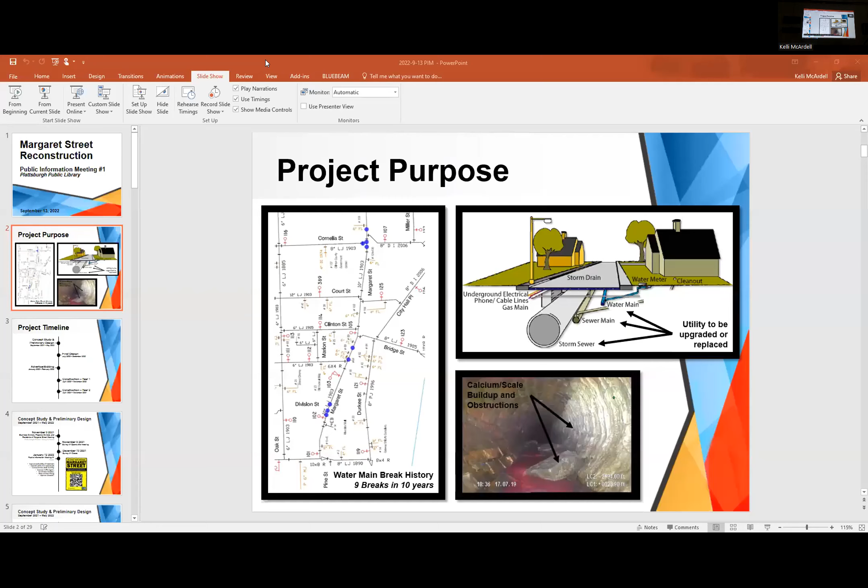So let's start with the project. Sorry, I'm getting told timeout. Sorry. And I think we're good now. Perfect, so I'm gonna keep rolling.

So let's start with our project purpose. Why are we doing the project on Margaret Street? The project is actually called Margaret Street, but for most of you who know and are aware of the project, it actually includes parts of Court and Brinkerhoff as well. But why are we doing this project?

We spoke, if you've been to any of the previous meetings, about the aging underground utilities. We talked about how some of the underground utilities are over 100 years old, and Andrew and his crews are going out -- we changed that number from 9 breaks to 10 breaks in the past 10 years. We know that when there's a water main break, it gets expensive. You have to mobilize emergency crews, do a temporary fix, and then come through and do a permanent fix later on.

So as part of this project, when we redo the utilities, what is going to occur is when you redo underground utilities, you have to dig down so deep into the ground. It is virtually going to provide an opportunity to install new sidewalks, new subbase, new asphalt, and virtually reimagine the top side of Margaret Street at the same time as replacing those underground utilities.

So that's a little tricky for you to understand. You can look at the picture in the top right. That's not just a normal photo that we show when we talk about underground utilities, because there's utilities running beneath the road that are providing the sanitary, water, different things like that that we use in our businesses and our homes every day.

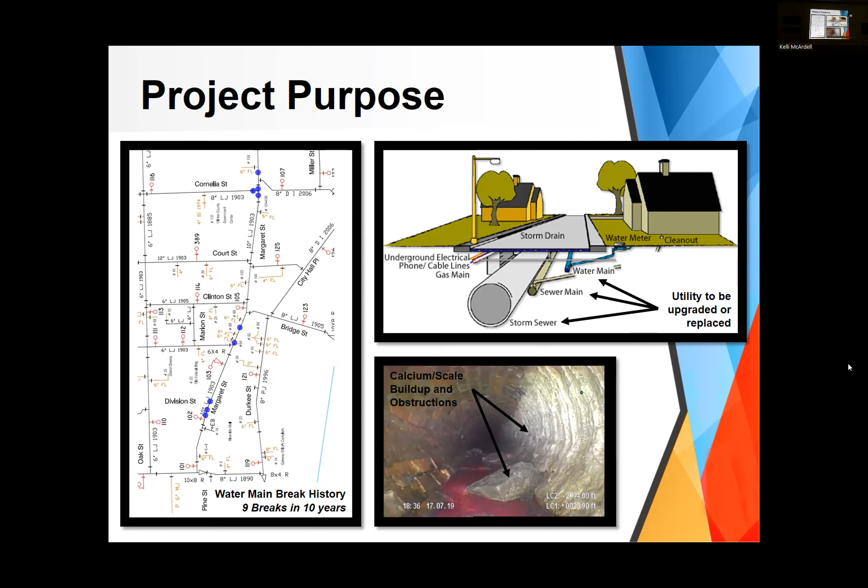Shannon, could you advance the slide for me, please? I got it. Thanks, perfect.

So our project timeline. Let's talk about how this project is flowing and where we are going with this project. So we talked about the concept study and preliminary design -- those were our meetings that were done previously.

And now we are rolling into final design. For those who are unaware what that is, that's where the engineering firm, us at C&S Companies, use what came out of that concept study to produce the project documents or project plans. We actually create 3D models of the roadway, so when they go to build the road, they will have it loaded into their bulldozers, and they can utilize that 3D model to help build the roadway more precisely.

So we're working in that final design stage right now. That's where we're really finalizing all of the details to produce those project documents. Some of you may know them as blueprints or project plans -- all different interchangeable words.

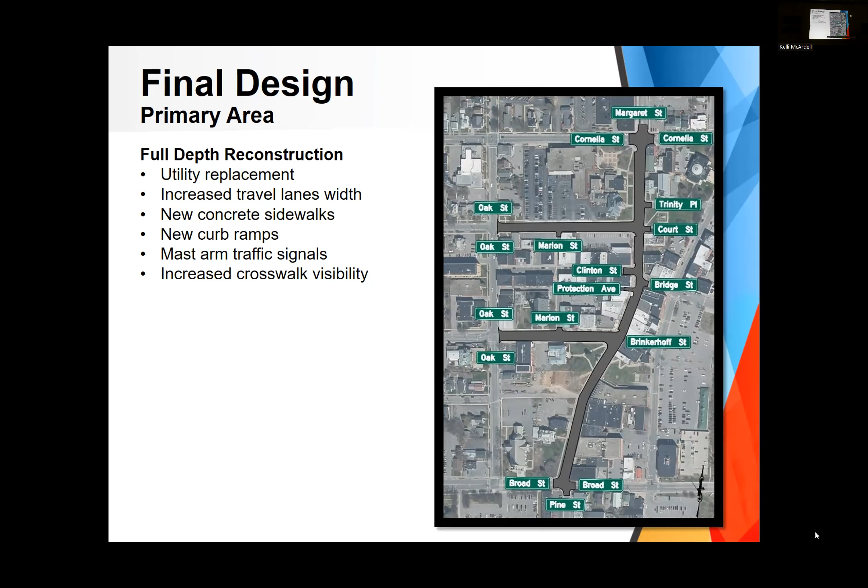So this picture right here is going to show the flow or circulation of the primary study area. What is changing is going to be the one-way from Court and Brinkerhoff. All the other travel flow directions are going to be the same.

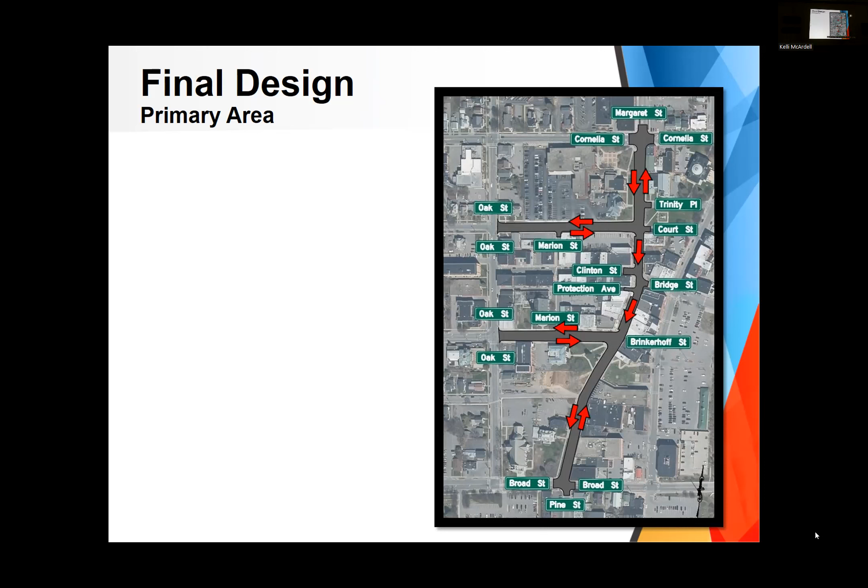We've previously talked about typical sections for those who have come to these meetings. A typical section is this graphic right here, like a cut of the roadway, so you can see what's going to occur within a certain area. So we broke out this project, and as you'll see, sorry for the people on Zoom, I'm blocking the video, I do that all the time, sorry.

So here is region 1. I'll put that up so you can see that. Anything that is a white car, if you can't read the text because I know it's a little small, a white car signifies a parking lane. It's not actually a vehicle driving, it is a parking lane.

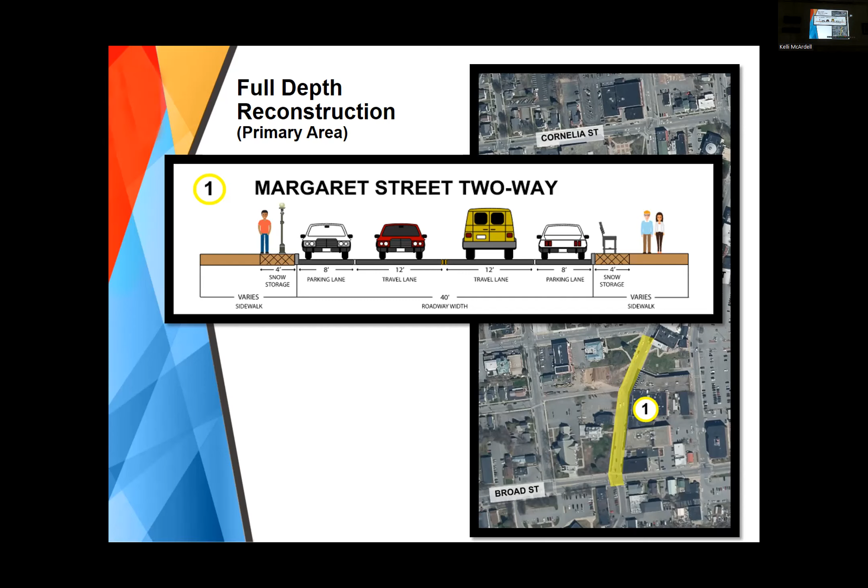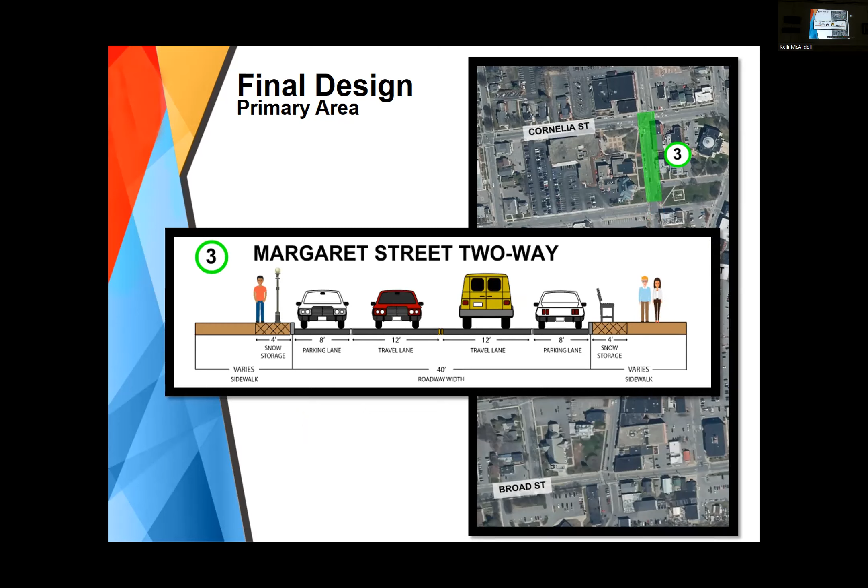So then we have the section between Court and Brink. I'll give you a few seconds to look at that and digest. Court to Cornelia. Brinkerhoff from Margaret to Oak. And last but not least, for that primary area, that's going to be fully excavated and rebuilt, so that's virtually a reconstruction is what we call that. You'll see right here, Court Street from Margaret to Oak.

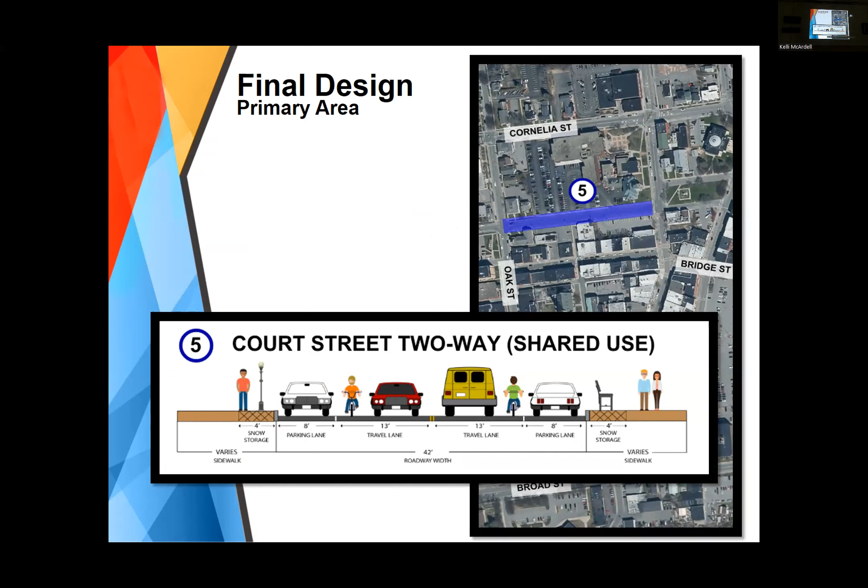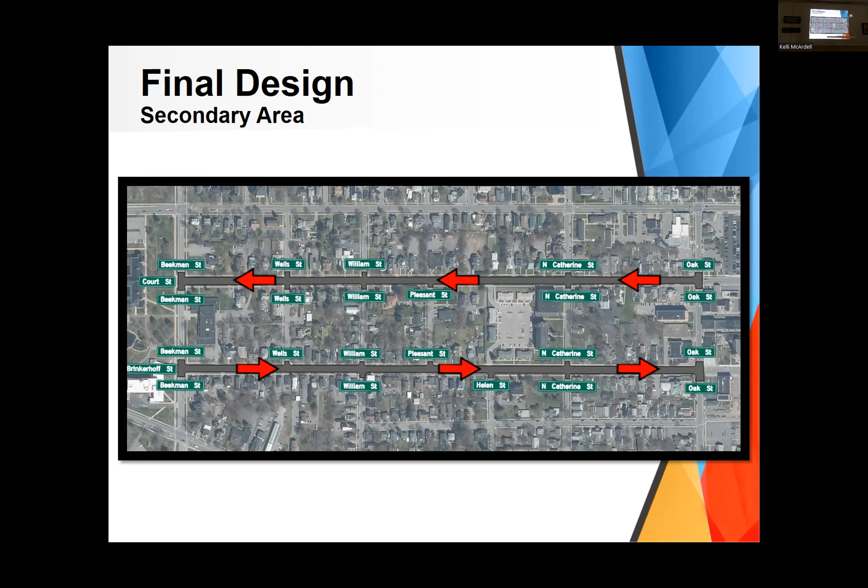At the same time, we're also going to add bike lanes. Here will be your traffic circulation pattern - same as now, but a travel lane will be removed to make room for the bike lanes. This follows the bike-friendly Plattsburgh study, removing the traffic lane to install the bike lane. We have traffic engineers on our team who evaluated this area to determine if the number of vehicular movements are appropriate for 1 lane, because you don't want it too congested - that would be silly. This area is appropriate for 1 lane traffic.

Parking on both sides still? Yes, parking on both sides. I actually have a picture coming up of this one as well. So here's those typical sections - this is Brinkerhoff in this area. If I'm going too fast for you, I'll show you at the end. I have this on the project website, so you can see all of this in your own time.

What is the purpose of a curb buffer instead of doing a bi-directional bike lane the other way? Great question. With this one, the bike lane is going to go with the flow of traffic, and this area from here over is actually going to remain as it is now, because this is going to be a mill and overlay up to here, and then those will be the new components. So this is actually going to stay as existing. If the city wanted to, they could invest in putting a bike lane in the other direction.

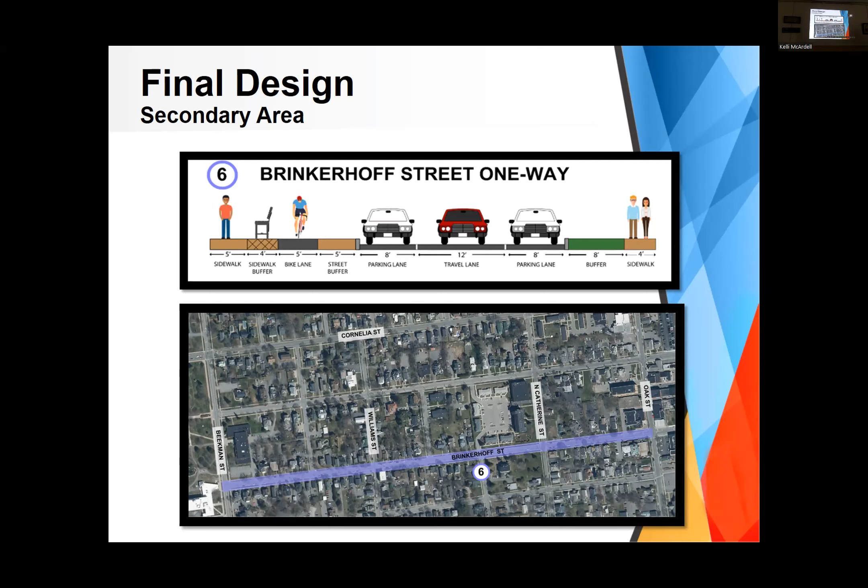So the sidewalks - actually if you stay a little after me, I can show you a great figure that would illustrate that. And here's Court.

So here are those photo simulation pictures. Again, this may not exactly be how it's going to look, but it's close, because like I said, we are working out those final details right now with the city. You see the roadway gets a little bit narrower, because we're removing the travel lane, but we're adding areas for bikers and walkers on the side right here. Here's Court Street.

And again, if you wanted to look at these, you can see them within our project website. At the end of the meeting, I will tell you exactly where to find it. If you're interested and want to pull it up right now, it is margaretstreetproject.com.

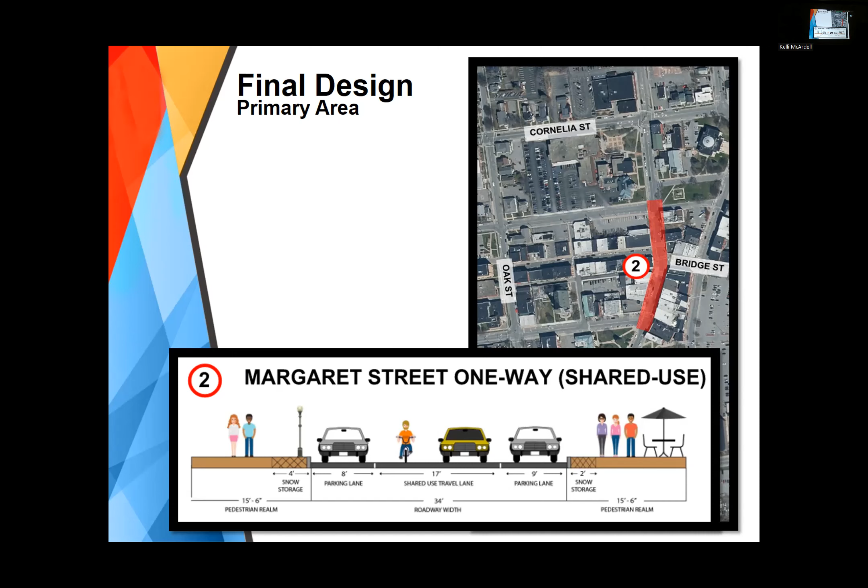But you have the bike lane, so what's the problem? They would go in the bike lane if they need to get down the road, unless there's somebody biking in the bike lane, then they get out of the way, just the car. I'm gonna argue this with you, because you can strike that lane, but there's no... dangerous.

Was that a designated bike lane or was it shared use? That's shared use, it's 17 feet, that's crazy. But we don't know that it's 17 feet. Even if it's 16, you can do it.

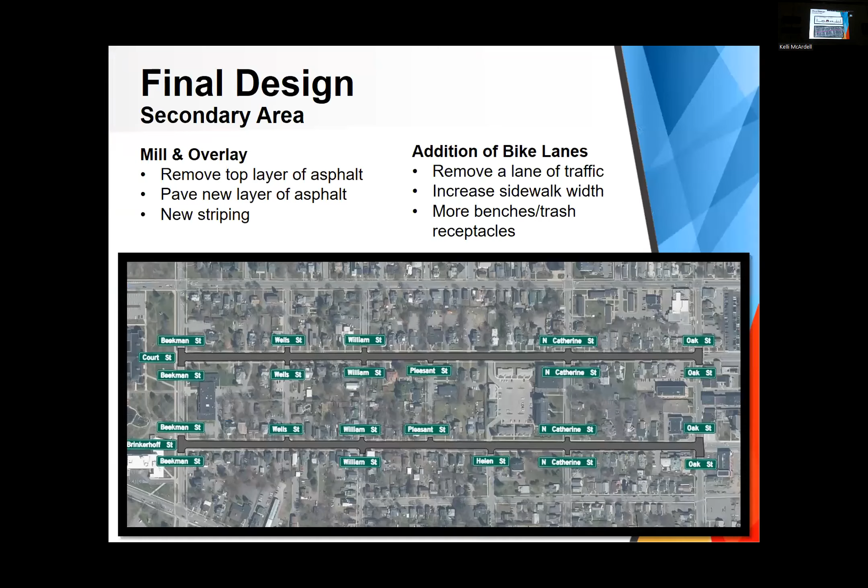I know that parking is important. But because we're only talking about that section being one way, is there any consideration given to only having parking on one side of the road in that section? It's only because we're talking about an interchange spot at that point.

In that region two, we have 15 existing parking spots right now. One of the main things out of the survey that came out as a top priority was parking in that section, specifically ADA or handicap parking, potentially putting some of those in, as well as individuals liking that parking close if they went to Hobie's or Twisted Carrot or things right in that area. That came out of the survey as a top priority.

Can we write that one down? One side, region two. Perfect, thank you. See, you guys have two questions.

One, the sidewalks - are they getting wider, maintaining the same distance, or getting a little bit smaller? It's going to depend on where you are along Margaret Street, and I can have those were drafted in our concept study. But the sidewalks are going to become shared widths, so they'll be the same on both sides.

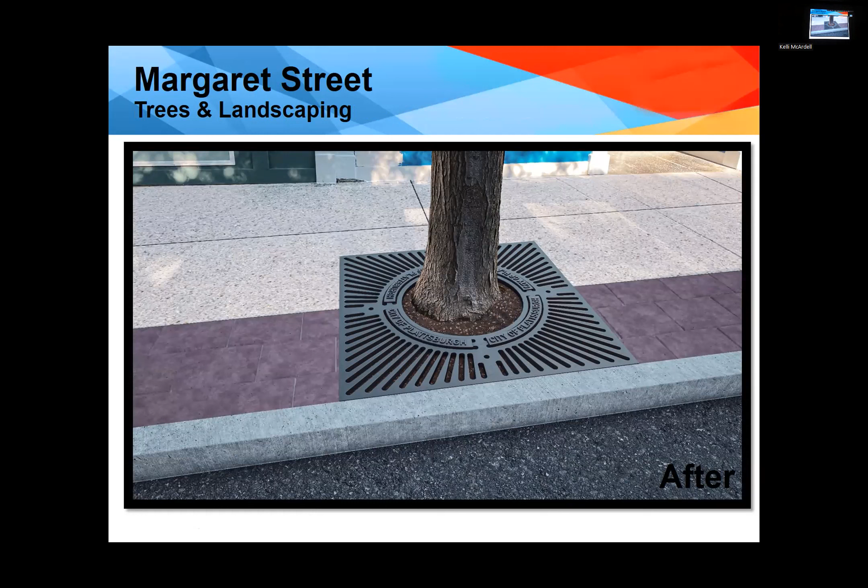They're horrible. You've got the sinkage of the sidewalk, you have the curb, because the new form of sidewalks are a nice one piece. You can easily push off the snow, but you have a very wide existing sidewalk now. If you were to take it down to 2 feet, a foot off each side, you would have that bicycle path.

Also, going back to when we're talking about snow removal on one side, Mr. Moore was pointing out, if it's a one-way street and people are parking on both sides, the left-hand side parking is on the driver's side, and that car will naturally park a little bit more out into the road because of the snow days. So maybe the best solution would be to have public works remove snow all the way down.

I'm sorry, I have a water line issue then - right now I'm hearing you, Steve. Speaking of water lines, what sort of water pipes are going to be used?

So more than likely, those are going to be SDR 9, which is HDPE or plastic pipe, which is what we're doing over at the base right now. I'm not sure if anybody's been in that area.

Is that all in one piece, or are they rolled? So what they do is they come in 50-foot lengths, and then we fuse the pieces of pipe together with heat. And actually, those joints hold stronger than the pipe itself. So if you were to take an excavator at each end, it won't break at the joint - the pipe itself will actually stretch.

And your PSI is going to be - what's that? Your PSI is going to be... So PSI will stay the same. It's not going to change because we have a gravity system in plastic. So that won't change at all.